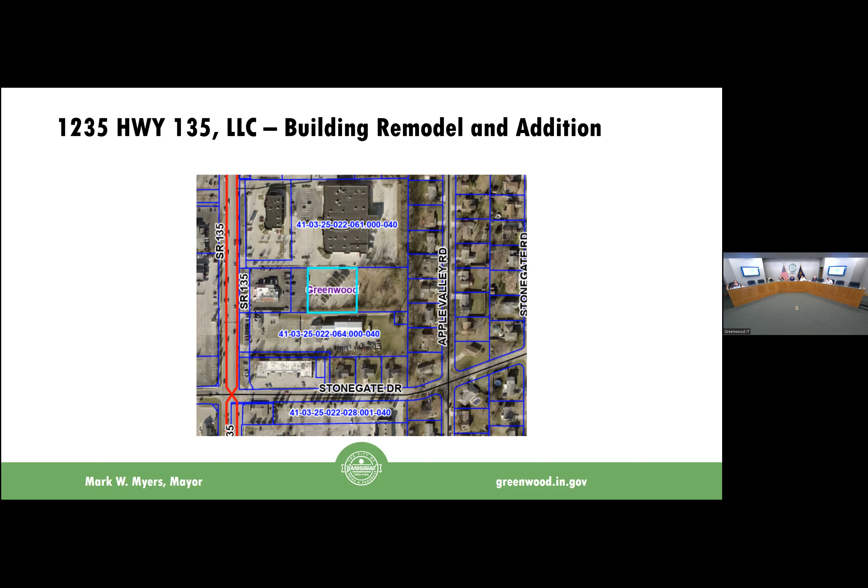Good evening. Come on up.

Good evening, folks. I am not Alex Hertuck, but I am Greg Thurman, VP of Acquisition for Redwood, in place of Alex tonight. We're here to submit a corrected easement for sanitary sewer for our Redwood neighborhood over on Smokey Row Road.

We have a memo in front of this gentleman. Anything out of the ordinary on this, Mark? No, other than the correction that had to occur. It's been reviewed by engineering and legal staff, and everybody's satisfied with it.

Pleasure of the board. I move that we approve the request. Second. Further discussion? Hearing none, all in favor say aye. Motion passes. Thank you. Pretty easy. Thank you.

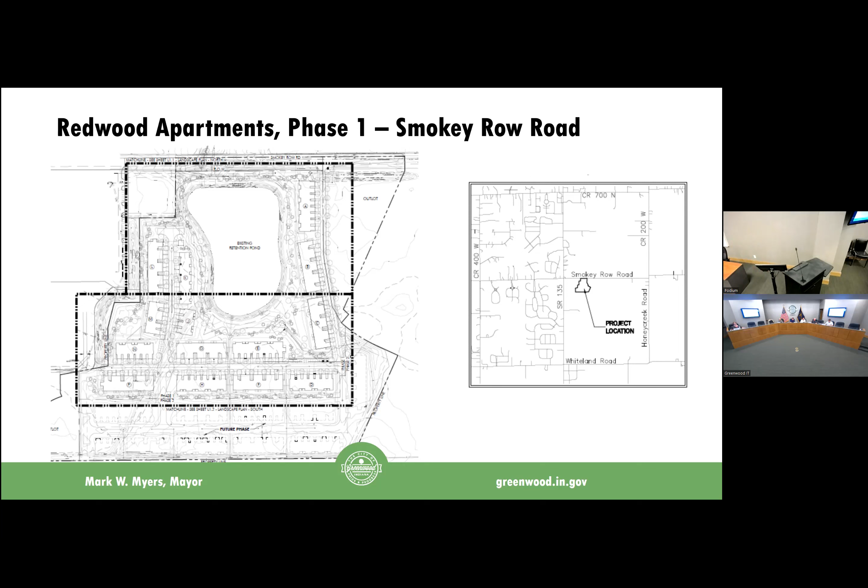Next, Karen Collins, talk about the Madison. Karen, are you with us online? I am. Good evening, good afternoon, excuse me. Tell us what we're doing here.

I'm Karen Collins with A&F Engineering, bringing before you the Madison subplats of Block C and Block D. Previously we had Block C and Block D, and we did not define each one of the lots for the townhomes. So these subplats are coming back through and carving out those townhomes. Each townhome will have its own lot, and then the common area behind the townhomes will be left as common area. That's for both Block C and Block D at the corner of Serena and Meridian Street.

Sam, was this what you were talking about? No, I'll do that on that as a walk-on. Okay, Mark? I think it is kind of combined with what you're talking about, but there are some conditions on the acceptance of these subplats, including the encroachment agreement that needs to be outlined. So we can handle it now or later, whatever you think is best. Let's do it now.

There's a portion of right of way along Meridian Street that was to be vacated and then brought into the new plat for the Madison townhomes, some of the other development out in Madison. Somewhere along the line, that right of way was never vacated, so it didn't reflect through to the Madison primary plat. The townhomes were constructed as approved, per plan, but the porches or stoops on the front end do encroach into our right of way, and the front yards and walks will be within city right of way. So to keep the project moving forward and keep the sales of these townhomes lined up, we're asking the board to approve these subplats on the condition that the developer work with CDS and the city of Greenwood on encroachment agreements for the areas that encroach into the public right of way. Long-term, we will look to vacate that right of way and probably replat the site so that it's one lot for each individual townhome.

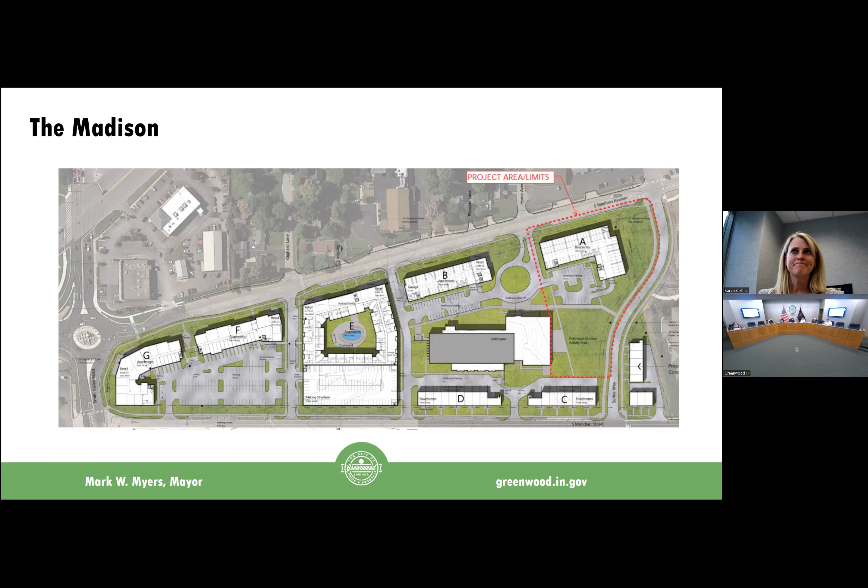Okay, next, Crossroad Engineers, Derek Snyder, talk about Shiloh's Corner. Good evening. Good evening. Right this side. Other side. See there. Share that, so it'll look like quicker.

Good evening. Derek Snyder with Crossroad Engineers, here on behalf of NJL, Stones Crossing LLC, requesting stormwater waivers for a proposed commercial development known as Shiloh's Corner at 1464 West Stones Crossing Road.

The property is located near 135 and Stones Crossing, more specifically the northeast corner of Galena Drive and Stones Crossing Road, immediately due south of the Barnum A. Morrison property.

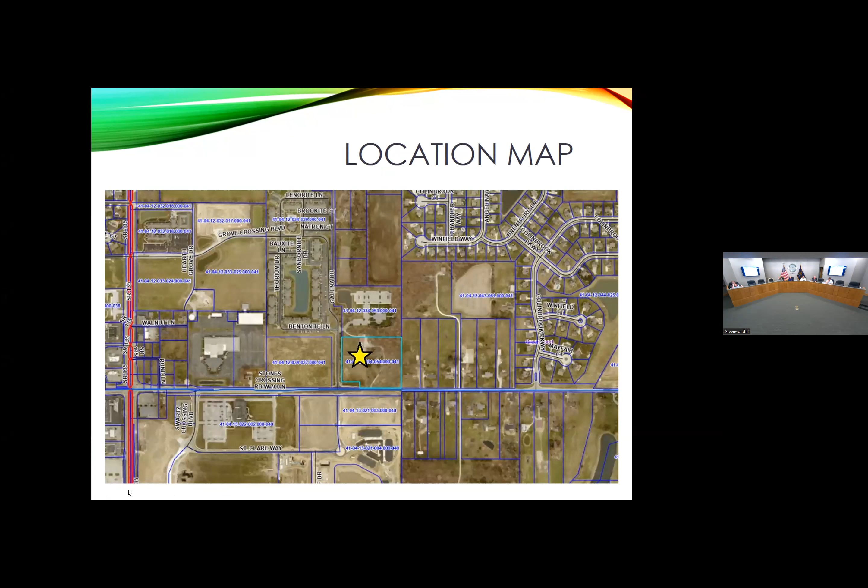Currently there's a single family residential home that will be demolished if it hasn't been already, and pasture with a couple existing structures, one of which is an existing barn that will remain in place and be incorporated into the development. There's been a variance granted for that barn because it encroaches into a setback.

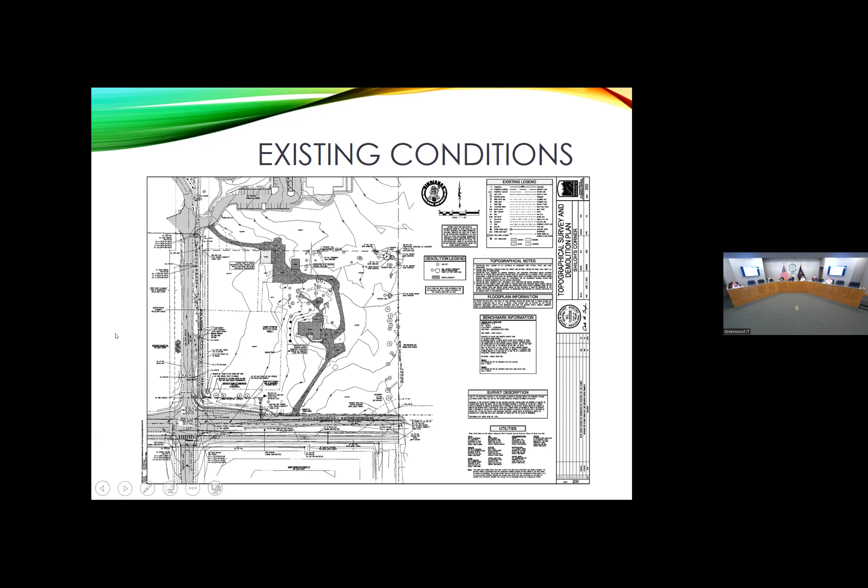The development itself will consist of 3 commercial lots, 2 of which are full service restaurants. Those are the 2 buildings on the far west side of the property, closest to Galena Drive, and then a multi-tenant retail building on the southeast corner of the property.

As you can see, we have our detention pond at the northeast corner. The existing barn, although not highlighted here, is to the northeast of that building in the northwest corner. The intent is that the facade will be dressed up, and they're going to incorporate it into the development on lot 1, which is a full service sit-down restaurant.

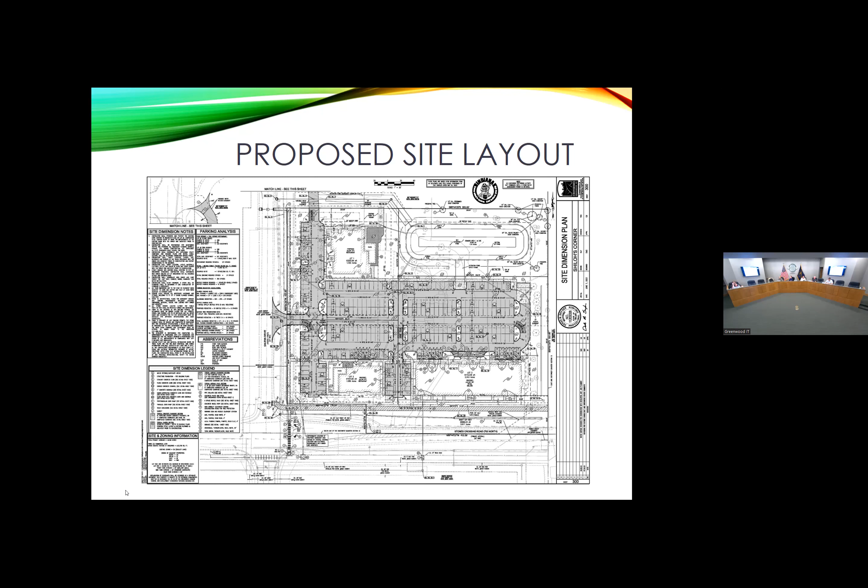So before you we have 6 waiver requests, which I know is not an inconsiderable amount. I will say that several of those are related to the existing barn and some of the topography issues with trying to maintain and incorporate it.

A little background on what that would entail: the restaurant located on lot 1 will be owned and operated by Cunningham Restaurant Group. They operate Bru Burger, Stone Creek, Mesh, and several others, a ton of different restaurants all over the state, some in Kentucky as well — some really high-end, nice restaurants.

The existing barn in question, which has necessitated the waiver request, will be utilized for storage. They're going to have raised garden beds for the restaurant and grow their own produce, vegetables, herbs, etc. that they'll use in the restaurant, and they'll utilize the barn just for storage of garden equipment, tools, and such.

Of the waiver requests submitted, the first is for pipe cover, related to the proposed storm sewer along Stones Crossing Road. Currently everything drains east to west towards an existing ditch on Galena. We have an existing storm sewer we're tying into, installing some inlets in that roadside ditch and reworking the grade. Providing 2 feet of cover over those pipes as you work eastward while maintaining our minimum pipe slopes, we would actually have some spots where that ditch would be above existing grade and above the road.

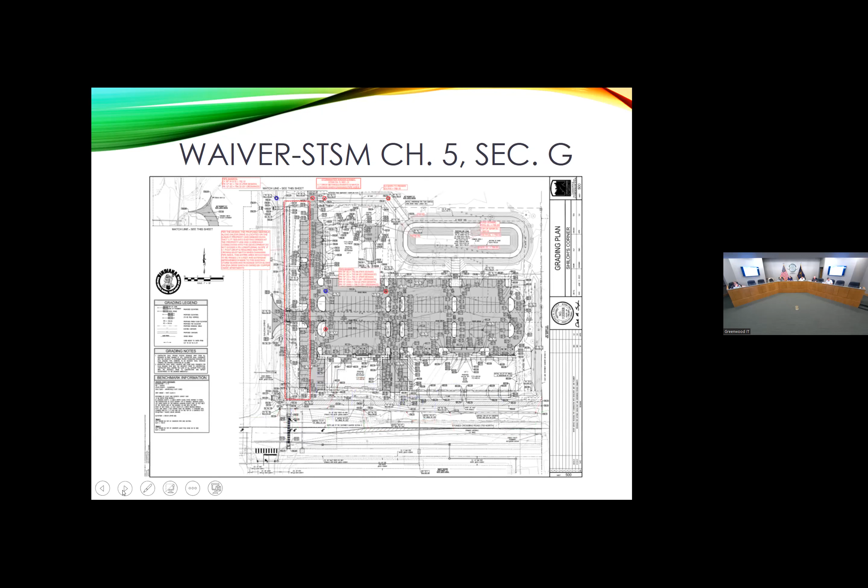Sorry to walk you through these one at a time. No, I understand it's a lot of information.

Do waiver two. So this waiver is the STSM stormwater standards require a 1/10 drop inside the structure, and then you match pipe crowns when you change pipe diameters. There is a provision in the STSM that, show that your hydraulic grade line stays in the system, that avoids the matching of the pipe diameters.

So in this instance, our storm sewer connection point is an existing 36-inch pipe along Galena Drive, and we're tying in at the same invert elevation of the 12-inch, and then extending our outlet from our pond at the minimum slope necessary. We are specifying an inline check valve in the outlet from the pond, just to prevent any backflow from that storm sewer, because the 12-inch pipe is more or less at the invert elevation of the 36.

But essentially what we've done is we've submitted the HGL calculations that show that the system functions as intended, which is that it can pass the 10-year storm event and it stays below the rim elevations.

In order to meet that specific requirement, we would end up having to raise the site depending on which location. At the pond, it would be about a 3 or 4 inch raise, as you work upstream in the storm system, specifically along Galena Drive.

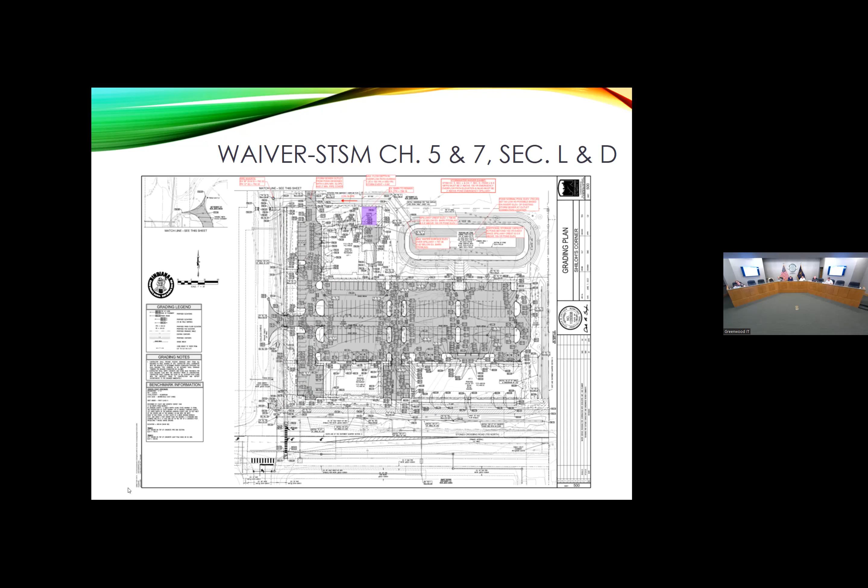Similar to the other waiver I mentioned, the STSM does allow for, in this instance, when you have a vegetated swale of at least 1%, construction without an underdrain, with the exception of the emergency overflow from the pond, which is less than 1% and will require a perforated underdrain. All of our swales are at least 1%, so we're asking for a waiver from the requirement that they include an underdrain due to topographical constraints.

On the west side of the property along Galena, there is an existing swale there now. We're going to regrade it a little bit because with the addition of the drive, a small portion of the water that was draining south needs to go north now. So we're just regrading the ditch a little to ensure it drains properly. There's actually an existing gas main right down the middle of that existing ditch, so installing a perforated underdrain in the center of that ditch would result in a utility conflict.

And again, with the number of mature existing trees on the adjoiner's property, we're trying to limit how many utilities, how many impacts are realized in that specific area.

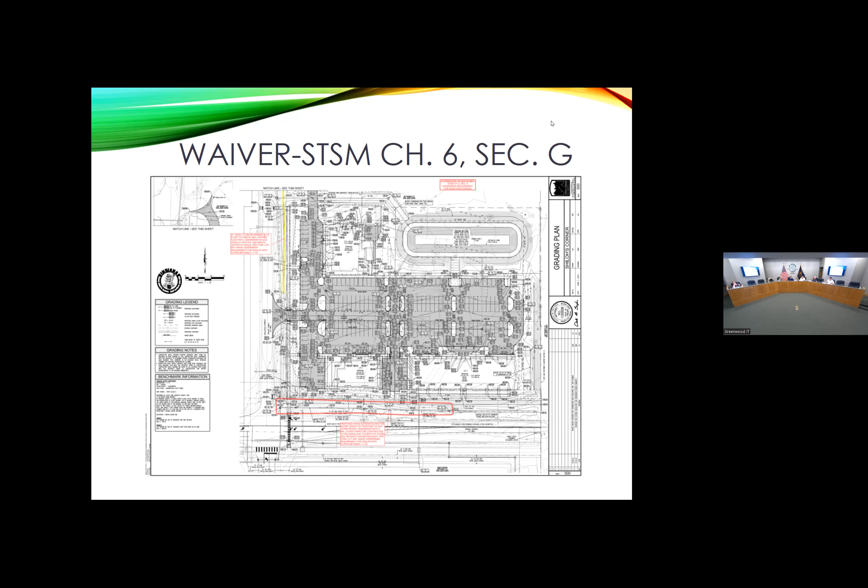Anyone from the audience wish to address us?

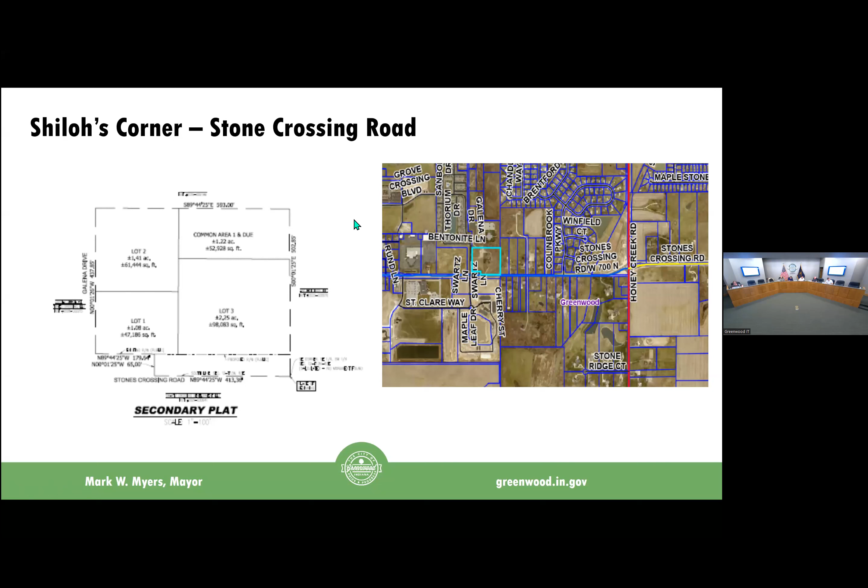Sam will go to the IDEM compliance plan status update. We hope to be completed with the IDEM compliance plan at the end of this month, and we retained an engineering firm to attempt to get it terminated.

Thank you. Your status of tasks? First, I'd like to do a walk-on, please. Sure. The police department wants to rid itself of a whole bunch of abandoned bicycles to a not-for-profit, Pedals for Joy, that refurbishes them and gives them to needy families.

I move that we approve the request. Second - this is for the signature by the deputy mayor. Further discussion? Hearing none, all in favor, say aye. Motion passes. Next up is resolution 2309.

Next up is resolution 2309. This is a resolution in response to the situation we had last meeting where we had a bank that made a material change to our bonds. I think we discussed whether or not we wanted a policy, so we weren't put in the position again where somebody was all the way down the road with a bank that wasn't going to work with our parameters.

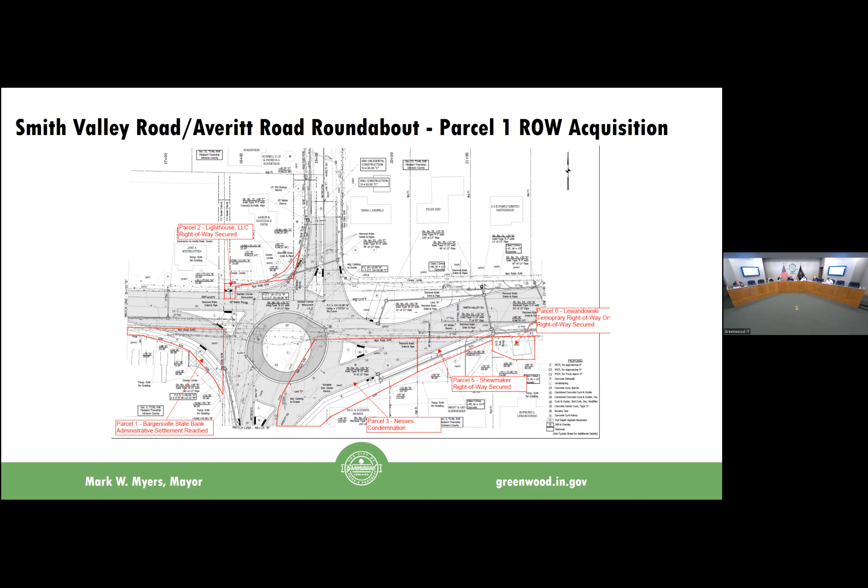The next item we have for you is the Bexley Village Apartments. We're asking you to authorize the mayor or deputy mayor to sign on the board's behalf the operations and maintenance manual for this development. So how does this relate to - they came in last year?

Yes, so we've been chasing them on some bank stabilization issues on their pond. They've come through our site development process and proposed a solution - I believe it's just appropriately sized riprap along the perimeter of the pond. So they'll - is there a different owner in there now? Is that part of it?

It's the same development corporation. It did change, I think, in the middle of the process while we were trying to pursue them to correct it. It did change in the last couple of years, but the most recent owner we've worked with for probably - since I was in the city, so over a year now - and they've been slow, but they've been good to work with. So it's more than one pond though, right? It's all ponds, yeah.

And hopefully this operations and maintenance manual can prevent this from happening in the future.

It'll be another tool for us to make sure they maintain it. So you think the erosion was caused due to lack of maintenance?

I think that fed into it. I think probably the way the ponds were constructed, the way the stormwater sheet flowed, there were a number of contributing issues. But if the original management company had gotten out ahead of it and tried to correct it instead of letting it go, I don't think it would have gotten to the state it did.

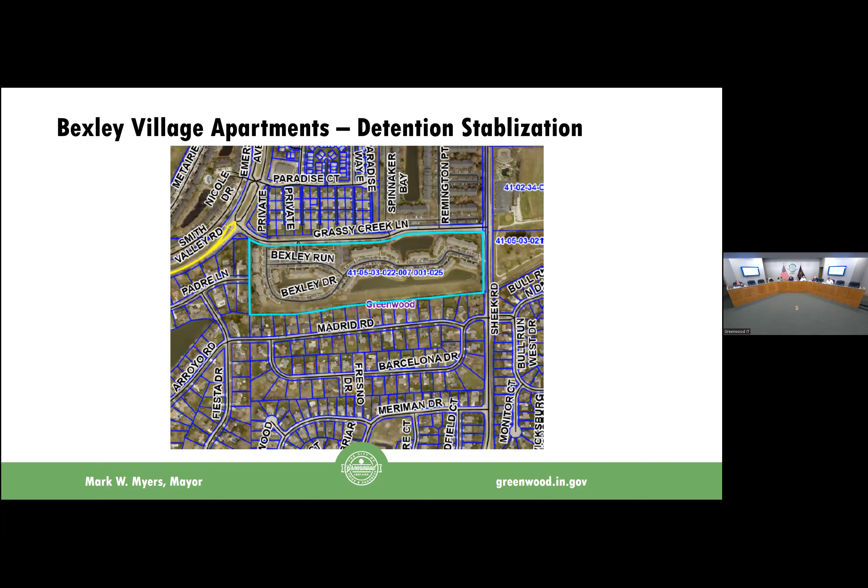I would move we approve the O&M manual, authorize the mayor or deputy mayor to sign. Further discussion? Hearing none, all in favor, say aye. Aye. Motion passes.

Final item I have for you, we had this at our last meeting. You authorized us to begin the process to draw down a letter of credit for the Twin Peaks restaurant development at the Greenwood Park Mall.

We have since heard back from the developer and who holds the letter of credit. They have offered to extend the letter of credit through, what's the date on that? February 18th, 2024, with an auto renew clause.

So it's at the discretion of the board if you would like to continue the process to draw down the letter of credit. If you don't think they'll make these improvements in time, or won't continue to work with us, we can continue the drawdown process and do the improvements ourselves, or we can accept their offer to renew and extend.

The process is at the point where the bank was prepared to cut a check today, and they delayed that until tomorrow to give you time to say whether or not you wanted a bond. What do you want, the 18,000?

What do you think is best? Do you have any confidence or encouragement that they are going to do it? Extend this? Could we pull the certificate of occupancy, or do they have a temporary certificate of occupancy?

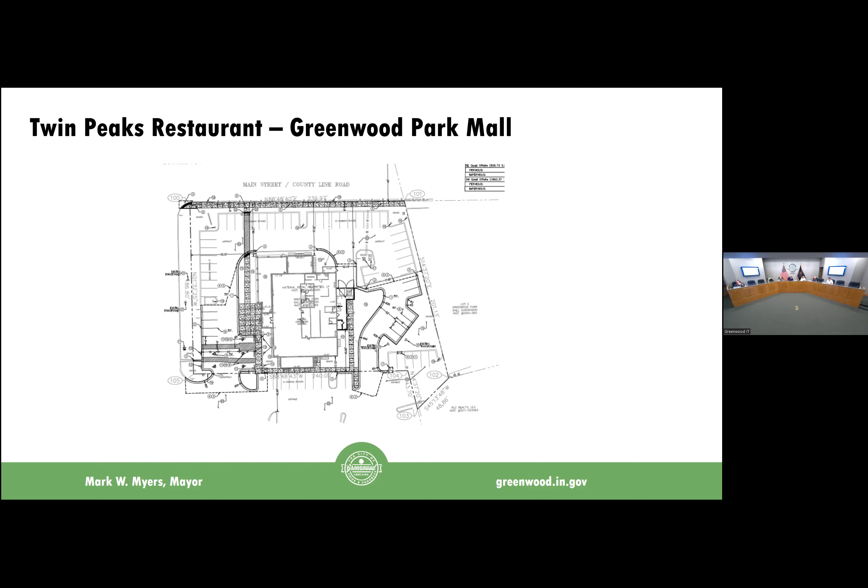Probably should go take a look at it ourselves. Be sure to get your picture taken. Yes.